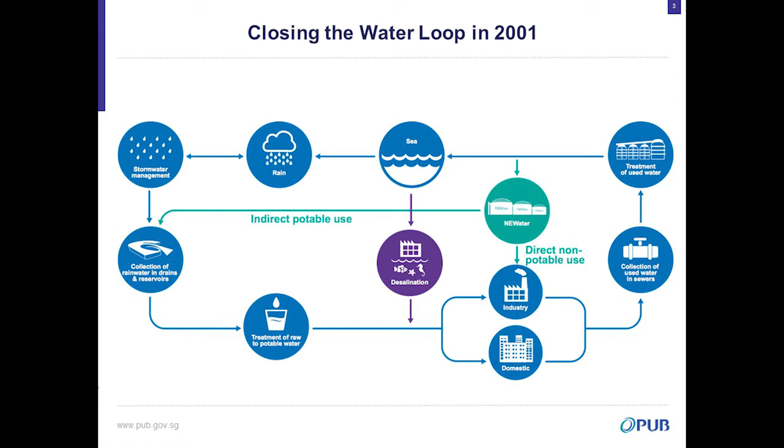With the closing of the water loop, we manage water based on three principles. Basically, collect every drop of water that falls in Singapore. Like today, it rained, and we try our best to collect every drop without causing any risk of flood. So in a way it's a challenge, balancing between wanting the water and trying to get rid of the water to prevent flooding.

Then, of course, we need to desalinate more water. It means basically the sea is the reservoir. Once you go to the sea, it's unlimited. But of course seawater is not free, the energy cost is very high.

The key is basically how to reuse the water endlessly. If you're able to convert seawater to fresh water, how do you keep it in the system as long as possible, before you have to let it go back to the sea? That is the key.

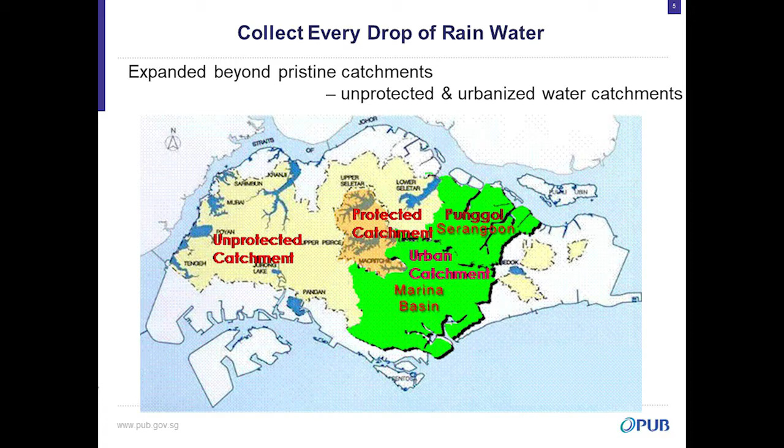In Singapore, two-thirds of Singapore is water catchment area. If you're in France, for example, your catchment areas are far away from the city, supposed to be pristine, and you draw the water from there to the waterworks and into your household. In our situation, the city center itself is a water catchment area. This is one example.

Our Marina Reservoir is a reservoir in the city. So it goes against convention.

When we started looking into urban area catchments about 30 years ago, people said we were crazy, thinking of all the negatives in terms of contaminants and pollution. But if you put in the right policies, controls, measures, pollution control, and infrastructure, everything is possible. In fact, some of our conventional water engineers acknowledge that water from the urban area is actually more pristine, clearer, or better than that from the forested area.

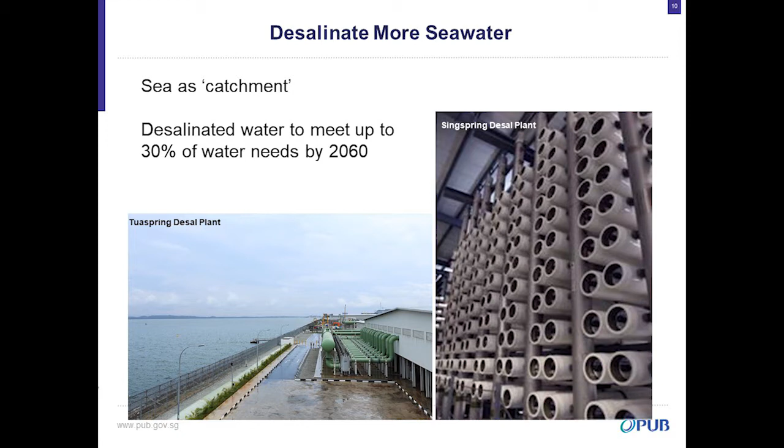Of course, we also convert seawater to drinking water. We have 3 plants, and by 2060 you'll meet 30% of our water needs. But of course, later on you pay a price for it, in energy, which I'll explain.

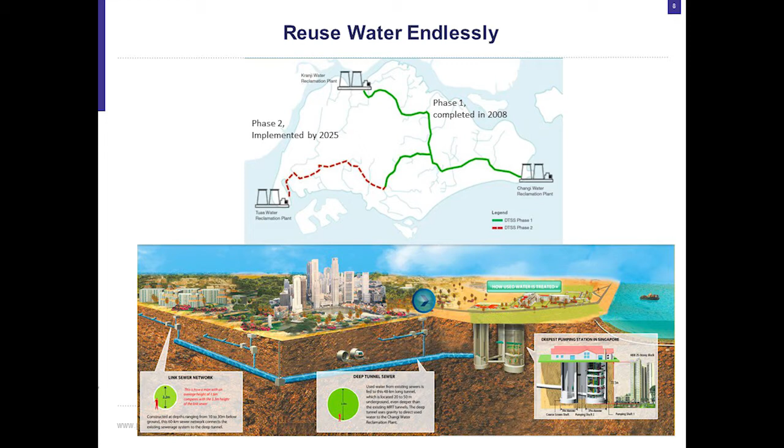But the key to everything is actually reusing water endlessly. The ability, after household and industry use the water, to collect back every drop of wastewater, clean it, and return it back. So in a way, we are creating in the system a second drop, a third drop, a fourth drop, and we have many NEWater plants running.

Let me share with you my personal journey with NEWater. Proving that it works is easy. But if you go back something like 15 or 20 years ago, especially in the US, where they talk about indirect potable use, it's all a psychological problem because it comes from wastewater.

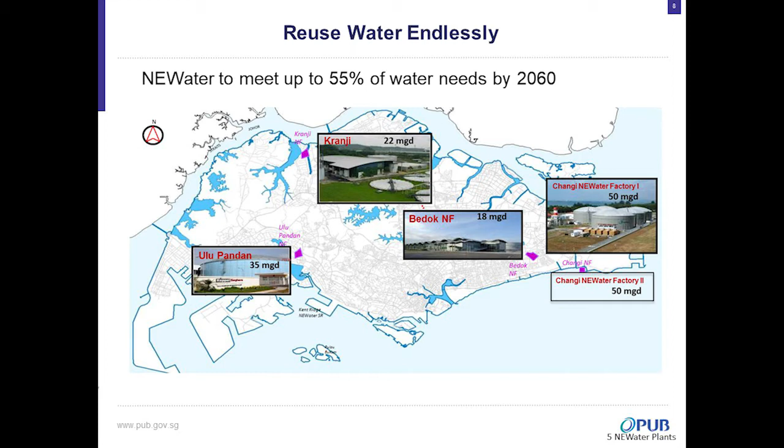So it comes from wastewater, and the issue is, wow, if I drink the water, will I grow horns, will I have cancer, and everything. This is always the public perception. But the perception is real. The question is how to address it.

So in the end, proving that I can get drinking water is easy. Communicating to the public, convincing them that the water is safe at all times, that is the difficult part. How do you break down engineering terms into simple terms?

For example, how do you explain to them, going a bit technical, that the reverse osmosis membrane's pore size, or holes, is 0.0001 microns, able to reject viruses, bacteria, and dissolved salts?

So in a way, we try to use animation. For example, the tiny holes in the reverse osmosis membrane, if you magnify them 100 million times, they'll be like tennis balls. And water molecules, magnified 100 million times, will also be like tennis balls. Tennis balls will pass through a hole that is of tennis ball size.

A virus, by comparison, is like a truck. So in a way, that's how we try to relate to the public, explaining technical jargon by breaking it down into a very simple way. It's not 100% precise, but it's 99% accurate.

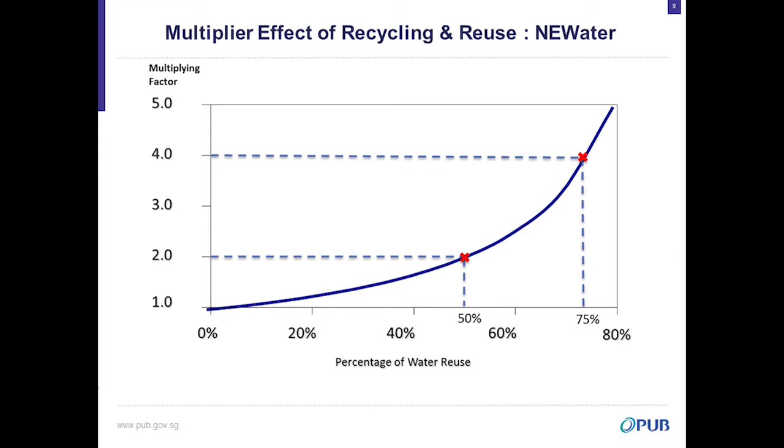So the way we manage water in Singapore is by creating a virtual reservoir through moving water in the system. If I recycle at 75%, I get 4 times the yield — that means for 1 real reservoir, I have 3 virtual reservoirs created by moving the water system. Remember, the key is storage. But if I produce the water and someone takes it away immediately, I don't need to store it. The only storage I need is maybe 2 hours, more for supply reliability. The reservoir itself now becomes the backup, the raw water.

But of course, while we solve the problem, we pay a price — in terms of energy, because desalination is not cheap. The energy number is very high. So later in my presentation, you'll see we're searching for new ideas, talking about overcoming our comfort zone, how to manage risk, and even how to celebrate failures — that it's okay to fail, as long as it's based on good science. Sometimes you're just ahead of the game, or you didn't anticipate certain things.

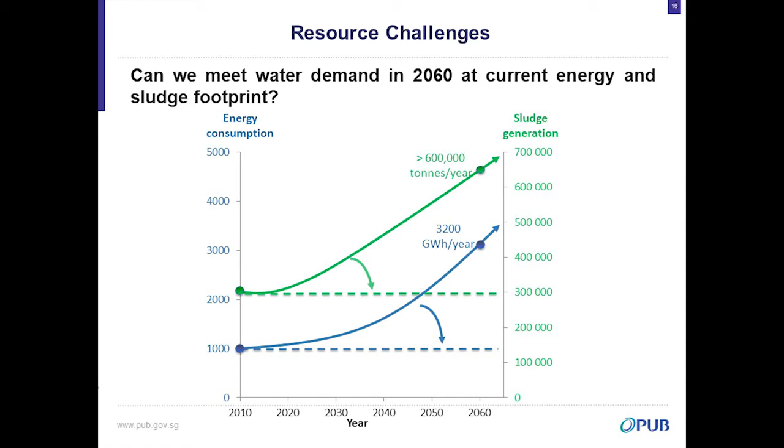So what are the consequences of business as usual, of complacency? Our energy footprint will increase 3 times, even though demand only doubles — because the source of water is coming from desalination and NEWater. More importantly, on the waste side, if we accept business as usual, sludge demand will double. Imagine today I need to manage 300,000 tons of sludge; by 2060, I'll have 600,000 tons — that means practically every day I'll have about 2,000 tons of sludge to dispose of.

We have no agriculture, no land to spread it on in this area. So we must look at solutions to help us overcome this. Should we treat waste as waste that needs to be disposed of, or try to convert it into something useful?

So our strategy's key is technology — technology is the enabler. We talk about strategy: water, energy conservation, and generation. It's a simple term, but how do we achieve it? Waste as a resource, as I mentioned earlier. And how do we change the behavior of households so they treasure water, understanding that water is precious and it's their job too to conserve it.

The other point I want to talk about is manpower. After we do everything, it still boils down to people. You can have wonderful ideas, wonderful technologies, but in the end, what makes or breaks the technology is people — operators who are able to understand, manage, and run it properly.

So one idea we have was desalination. The numbers was very high. Today's technology is 3.5 kilowatt hour per cubic meter. That is the number. Should we accept it? Or start searching for ideas in a way to drive down the energy?

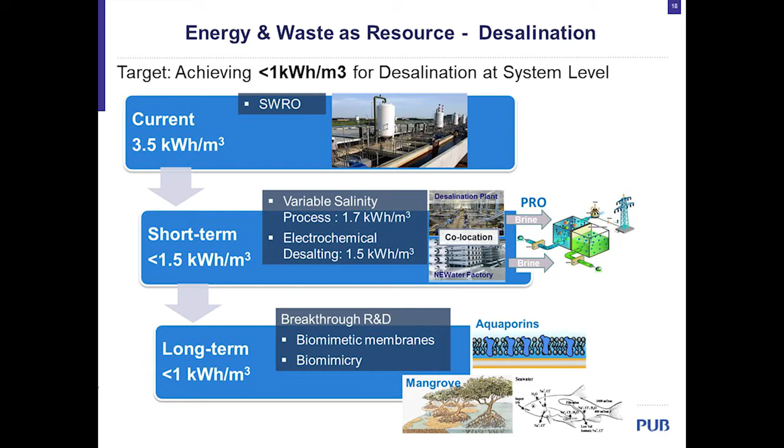So what we do is we look long term. Sometimes when we run out of ideas, we go back to nature. So actually we are studying things like how the mangrove swamps extract water. Mangrove swamps are in the estuary areas. There's seawater coming in, they can't be drinking salt water, we can't be drinking salt water. So how did the simple plant get water out of seawater? How did they desalinate the thing? So we're trying to get ideas from them.

And in future, it has implications in terms of the medical side, because in terms of kidney dialysis and everything, in a way, from the water side, it may also go into medical eventually.

We also study fish. How does fish extract water? Some in the sea, some in... Then how some fish, which can live between marine and freshwater environments, how did they switch from marine to freshwater? There's a local fish called tilapia which can switch between freshwater and seawater. So it's as though there are two systems, two trigger points. We're trying to understand that.

Wastewater in future will be a power generator. That means there should be more than enough energy in a wastewater treatment plant to run the wastewater plant. And then maybe if we get our technology and process right, it may even help us export some power.

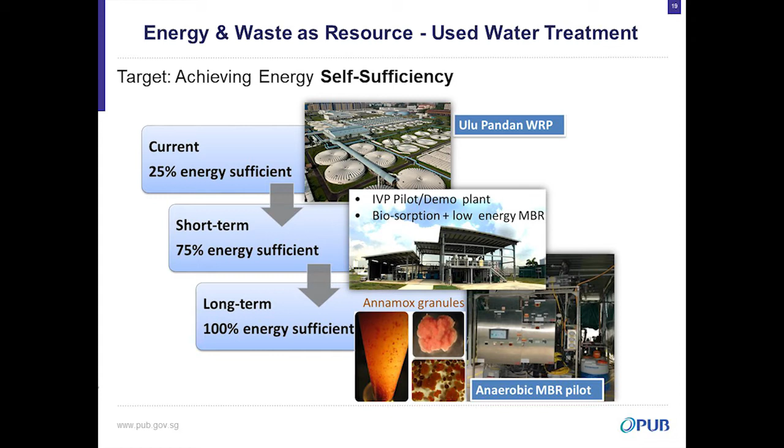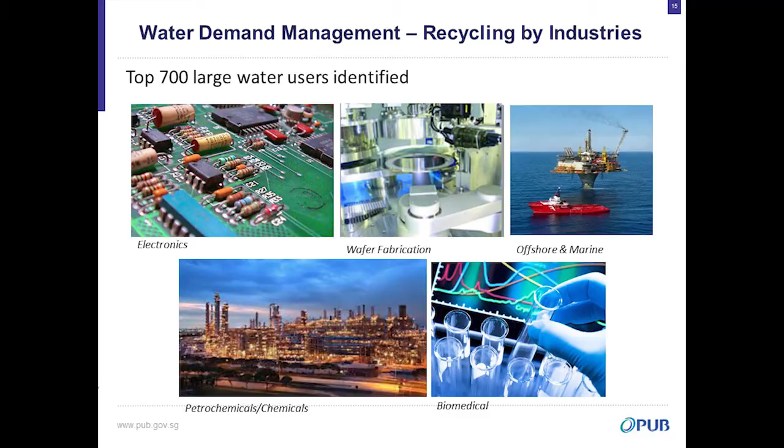So these are the technologies we're looking into. Recycling by industries, because nothing is better than to ensure industries themselves use the water wisely. So we are encouraging them to have the best practices so that to produce a product, they use minimal water or the smallest water footprint.

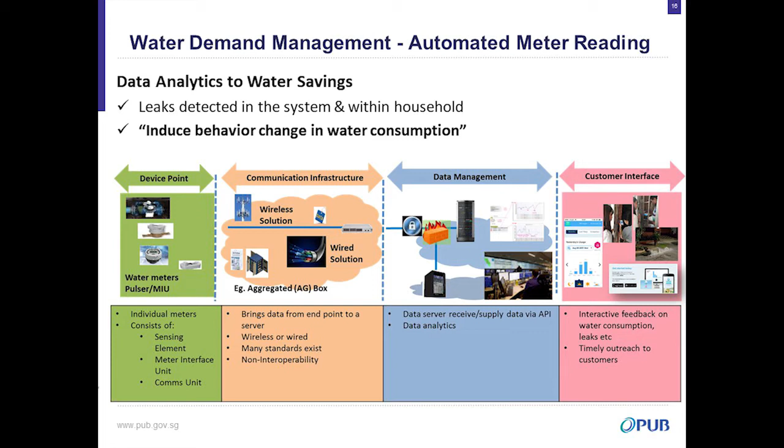Even automatic meter reading, which I think in Paris, in Bordeaux, they are really using it. So basically the whole driver for that is changing behavior. We have pilot tested this, demonstrated this, and we strongly believe, it's just simple changing of behavior using the automatic meter reading, which offers the consumer real-time data on their water consumption. We could save maybe about 60,000 to 100,000 cubic meters of water.

Manpower, I told you earlier, low birth rate. So basically we must do something about it. In Singapore, every young person wants to level up, everyone wants to be a graduate, so sometimes getting poly graduates is quite difficult. So the question asked is, how do we redesign our work processes to accommodate the change in the profile of our workers, maybe in terms of level of technical understanding, competency, and basically in the end, doing more with less.

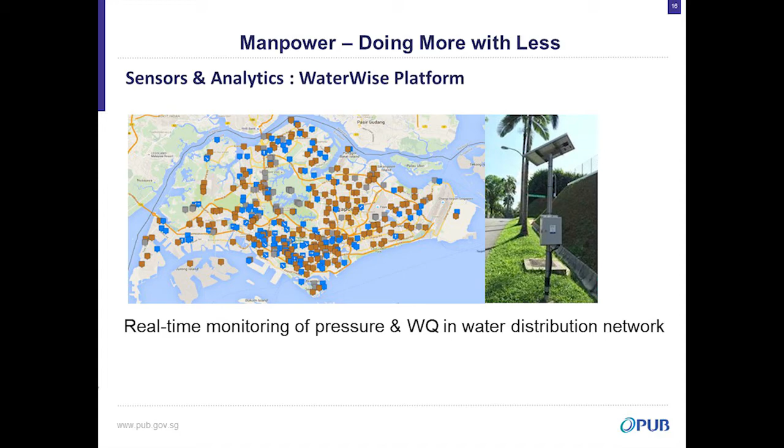Basically arm him with a lot of devices, a lot of sensors, so that in the end he is able to do work better, more efficiently. In a way, instead of 5 people down there, maybe it's 1 person and 4 virtual assistants running around.

So we have, across the whole of Singapore, armed ourselves with sensors. Basically we're tracking water quality in real time, partly as a service to the public in case of some issues. But the other thing that is very important is security, water security.

Marina Barrage. So it seems that managing storm water real time, this idea actually we learned from Bordeaux in France, where I think 5-10 years ago, there was a flood. So the question asked is that you go by the conventional way of widening the canals or rivers, it will cost you a few billion dollars.

So by having all this technology in terms of real-time monitoring of moving the water in the system, it actually saved the city of Bordeaux a few billion dollars, if I'm not mistaken. So the question asked is that after they installed the system, is it proven that it really works? I understand that in Bordeaux, there were 2 rainfall incidents that happened at the same time, so it was tested. So we are learning from France on some things.

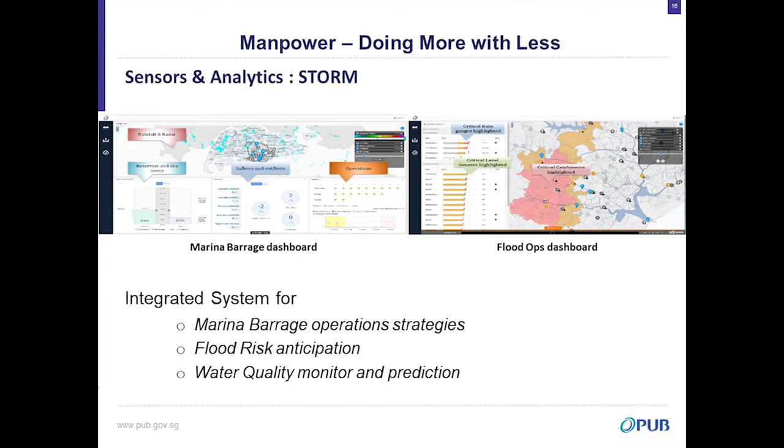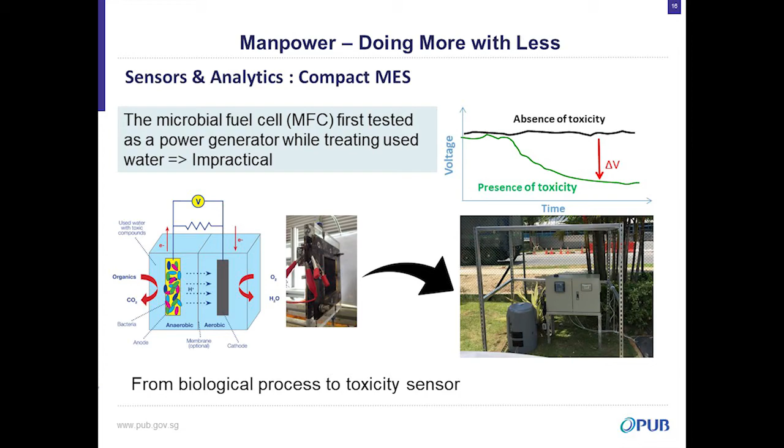This is a project that came from a failure, in the sense that the science, the logic is that if I can produce electrons immediately from wastewater treatment plant, it's the most efficient. But we made one mistake - we forgot about the footprint, because the resistance is very high, so the footprint has to be very big. But when we went to the lab, we saw that actually the fuel cells are very miniature, small ones.

The question asked is, can we use it as a sensor in terms of source control? Because remember earlier I told you about water reuse - one of the water reuse things is that the water may come from industries, so source control is very important. And we have been searching around for good sensors that tell us there's someone illegally discharging something. You will trigger an alarm, you will immediately collect a sample automatically, and we analyze the data, you can prosecute.

Instead of today, it's a cat and mouse game - you open manholes, you can discharge at night, you can't catch the person. So now with this thing installed in the factory, it's 24/7, so he's got to behave himself, right? That's the key.